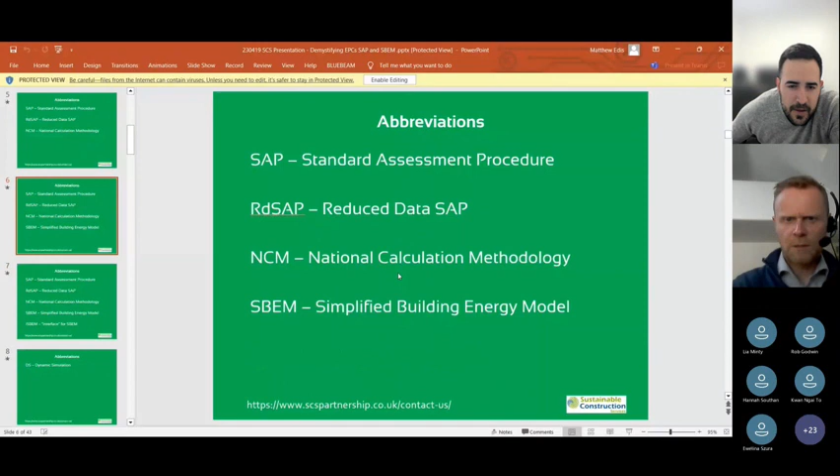Sometimes people here. Sorry, say again. The slides. It's just staying on slide number 1. Did you want them to move forward? Apologies. So you can't see what I can see now? Can you see this? Yeah, I can see that now. You've changed the slides. I'll stay on this then. Apologies. Hang on, I'll just shove that over. The joys of technology. I'll move that as quick as I can. Okay, yeah. So here we go.

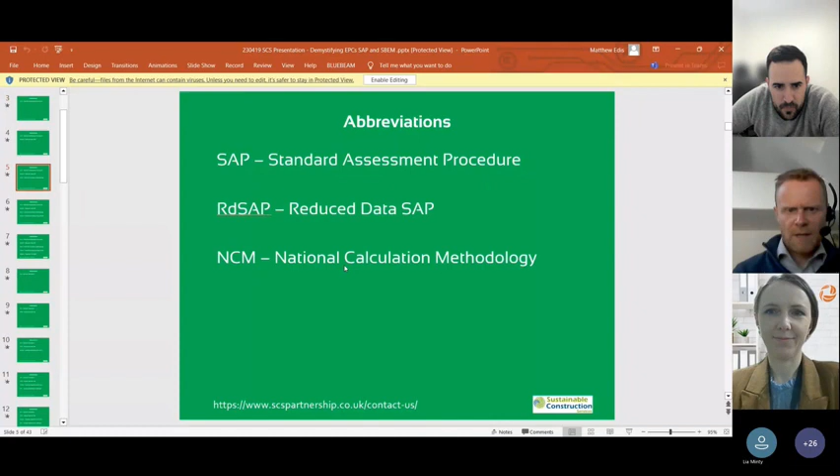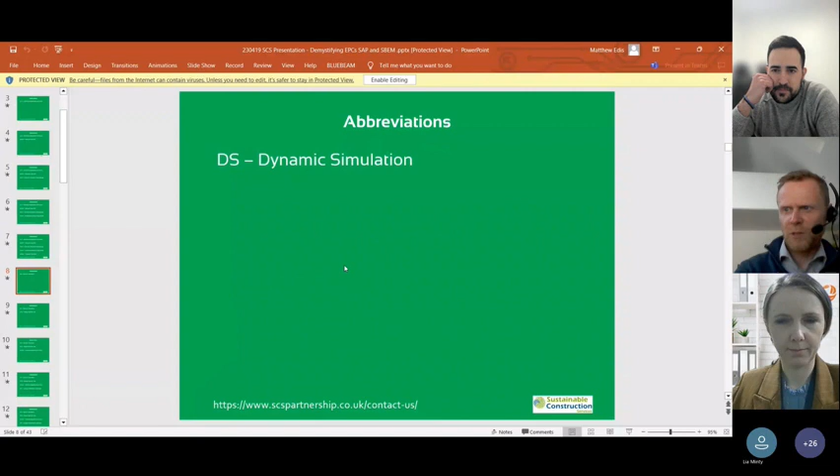So RDSAP, NCM, National Calculation Methodology, SBEM, Simplified Building Energy Model, iSBEM. The acronyms go on. DSM, Dynamic Simulations, so a much more interactive, sexy, super duper version of modeling, which is different to the SBEM, but also can be used in Part L. DYS, Design Summer Year, can get confused with DSM, Dynamic Simulation, and is to do with overheating. And then there's TRY, which is the test reference year as well.

So you've got that. The BRUKL, quite a lot of people talk about BRUKLs. If you're not sure what that is, it's the Building Regulations UK Part L. It's the document you get out when you do the energy calcs, and it's the standard response showing how you're complying against the criteria in Part L.

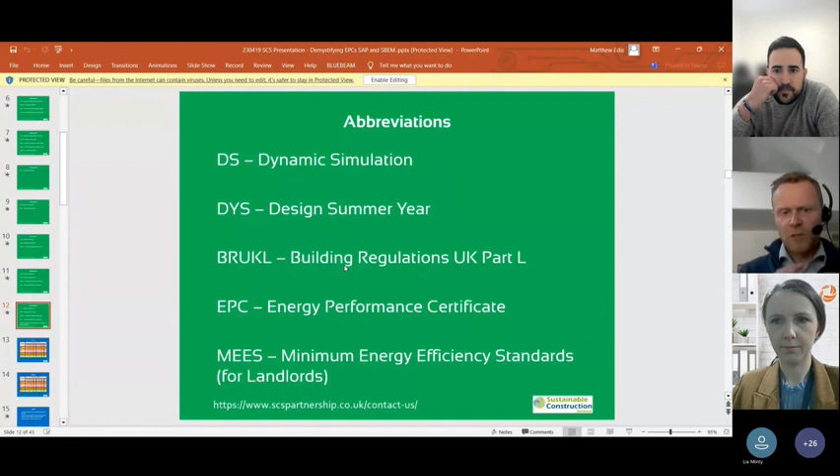EPCs, most people talk about it, it's probably obvious, but energy performance certificates. And MEES, minimum energy efficiency standard, is the thing that landlords worry about when it comes to EPCs. So if I mention some of these acronyms, then that's where it's come from.

Okay. History of Part L. Part L is the conservation of fuel and power. So we never used to be interested in CO2 back in the 70s. I mean, it came around first in the 50s, but something looking like what we've got today came in 76. Anybody who's aware of the history of fuel knows that's when there was the oil crisis in the 1970s. So around that time, we started to get a bit more focused on energy use.

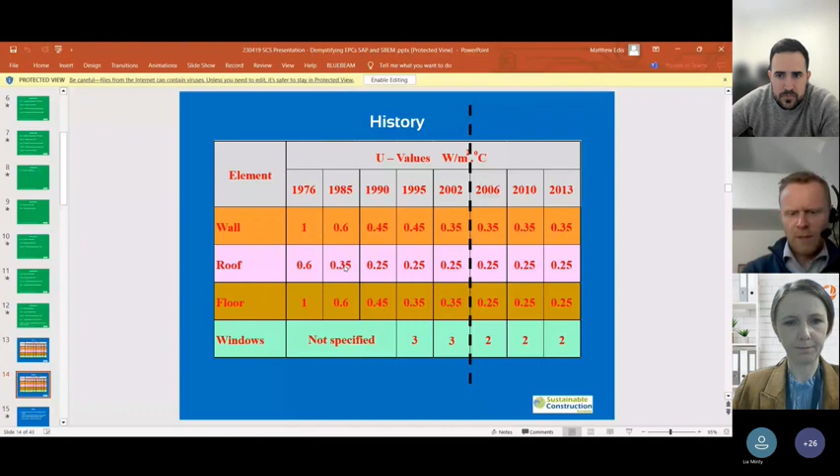And over time, you could see that there's an incremental improvement in some of these wall and roof U-values. But then there's a kind of line in the sand where you can see that nothing very much changed, 2006, 10, 13. So why was that? That was really when energy modeling came in. So why did we get into energy modeling? Building regs never had these energy calcs.

The big thing that came in was the Energy Performance of Buildings Directive. It's a European Union requirement, and it said that all member states had to have a way of addressing emissions in their buildings, and to try and respond to things like the Kyoto Protocol about CO2, and obviously we've had the Paris Climate Agreement subsequently. So it was really that thinking. And at the time, best part of 20 years ago, that was pretty innovative. And so all countries had to do something about it. And we'd only just released our 2002 building regs when this all kicked off.

So the targets were that we're going to reduce emissions by 25% every 3 years, we were going to get down to net zero by 2016 to 2018, and refurbishments were going to be as tough as new build. That was the aim, and that was the great hope.

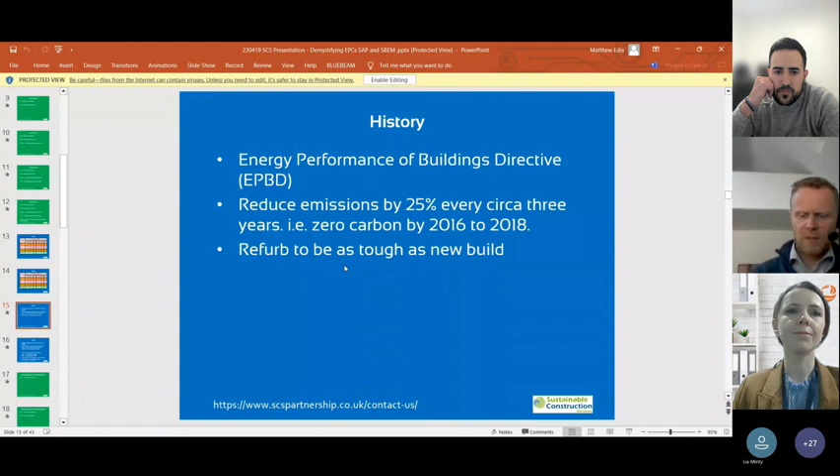The reality is somewhat different. 2006, there was a 25% reduction on 2002, but then it was only 8 to 10 again in 2010, and it's taken until 2021 to be able to get 30% down. So in overall terms, we're only about half of what we were in 2006. So 2002 is an interesting one because we defined our performance against the 2002 building regulations.

So the idea of it was that you would build an energy model. It would be based on the regulations that were applicable at the time of 2002, so very much elemental. What your U-values were, what the efficiency of equipment and boilers and lighting was at that time, and therefore we were going to use that as the line in the sand. That's adjusted in more recent regs, but that was the original idea, and then we put some reduction factors.

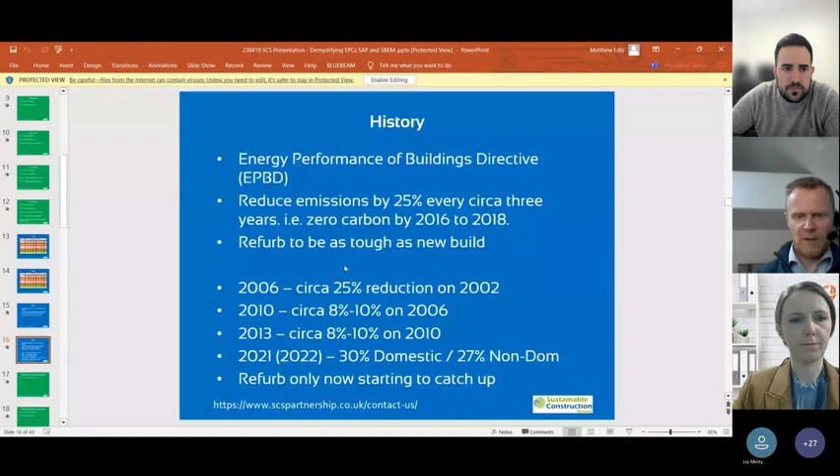So the idea was we were always sort of trying to move it on and move it forward. That's why, even though these numbers add up to more than 50%, I would suggest we're only kind of 50% better than we were years ago. Okay, so that's the potted history. I don't want to labour it too long, but okay, building regs and trading standards.

Why trading standards? So Part L, everybody's fairly familiar. Building regs, thou shalt do certain things. You've got to get it through the building control officer, and Part L is part of the checks of that. However, EPCs are not actually a regulatory requirement for building regulations. They're technically a trading standards document.

EPCs give you your lovely A to E or A to F energy label, but it's very much like your fridge or your cooker or equipment like that you get for electrical goods. So therefore, it actually comes under trading standards.

Now, the reality is that in the time I've been qualified, I've never had any contact with trading standards. And the only time that anybody asks for them is when the building control officer asks for them, as part of the mandatory requirement at the end. But technically, the people who govern EPCs are trading standards.

Okay, so where else do you use Part L calculations? You tend to hear them being used in planning applications, BREEAM, Home Quality Mark, that sort of thing. So what you're doing there is producing calculations that are standardized and consistent. And that's really the key to the use of SBEM or SAP. And the reason that the councils like it is because it gives you a standardized methodology to follow.

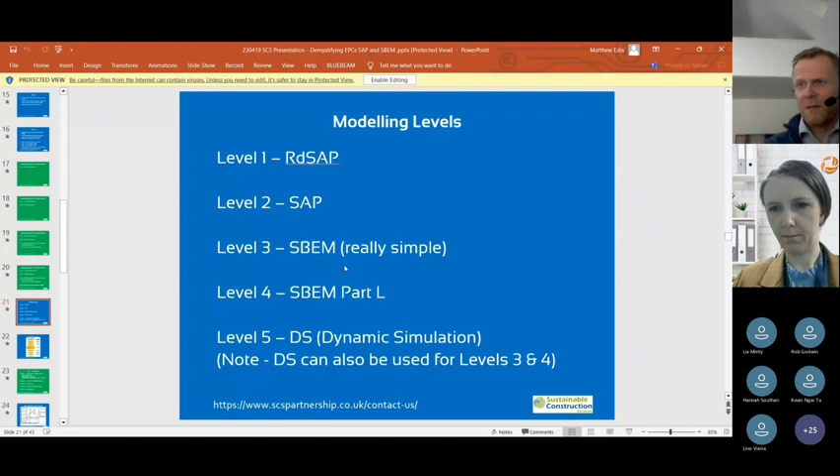SBEM level 4, you've got most buildings, but level 5 covers anything that's more sort of sexy, I guess. Anything with an atrium, dynamic blinds, those sort of things that are going to be a bit more interactive and iterative on the model performance, and therefore you're allowed to use a dynamic simulation. Interestingly, you can use dynamic simulation also to cover levels 4 and 3. Why would you do that?

2 reasons. One, because as a modeler, the rules for level 5 are slightly different to level 3 and 4, and it's easier to only have to remember one set of rules rather than having to keep on jumping between rules and make errors. But the other is that you would generally want to use a level 5 because you get a slightly better result. The dynamic simulation tends to produce a better answer than the SBEM answer because it's a better way of mimicking your actual building performance.

Whether that's right or wrong, I've long since given up trying to argue the case, but it is just a statement of fact. And also, different softwares are slightly different in their performance. TAS produces an ever so slightly better result than IES. Not massive, but it's marginal.

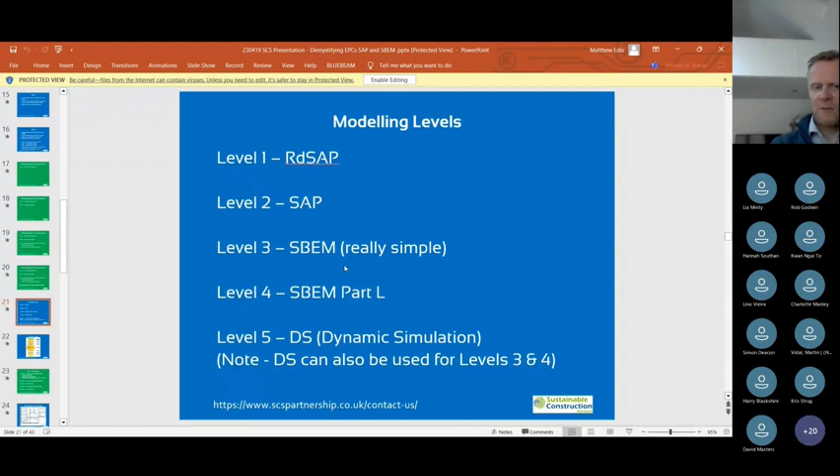And on one project, because it was such a fine line and the BREEAM was such an important thing for the outstanding rating, they actually ran the TAS model for BREEAM compliance and ran the IES model, because it was the one that the contractor's team wanted to run with, and used that for building control submission and EPC lodgement. So that's a bit of an extreme case, but it does show you that even within the software there is slight variation.

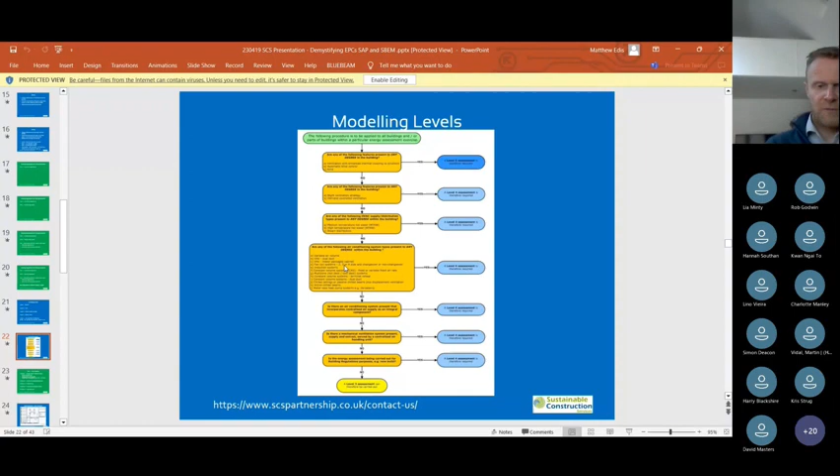And this is the table you follow. You can find it in the conventions and documents that are associated with Part L, but you follow this. But if in doubt, you go to level 5 if it's non-domestic. Okay, 5 criterion. Keep on rattling through. Part L, there's 5 criterion.

One is focused on target emission rate. So you build a notional, in whatever software you're using, you put in the data about your systems, your equipment, your usage types. So is it an office, is it a classroom, etc. And it produces a couple of calculations. In the domestic it produces 3, in the non-domestic it produces 2, and it's an emission rate, so the CO2, and a primary energy rate, the sort of energy use of the building.

And generally all these softwares and calculations are producing energy calcs, and then once you've got your energy result, you then apply CO2 factors. And the biggest single change between the current regulations and all the previous versions of regulations, the CO2 emission for electricity used to be sort of 2.5 times the CO2 emission rate for the same amount of energy used compared to gas. Gas doesn't change, and electricity does over time as we green the grid, and the number for electricity is much more comparable to gas now.

So when you start to apply COPs, coefficients of performance, the sort of energy in to energy out, when you're using heat pumps and stuff, for every 1 kilowatt of energy you use, you get 2.5 kilowatts of useful energy, that sort of thing. You can see that everything is going towards electric, and that's a good thing anyway, because it means we're not burning fossil fuels that, once released, we can't really get back into the ground.

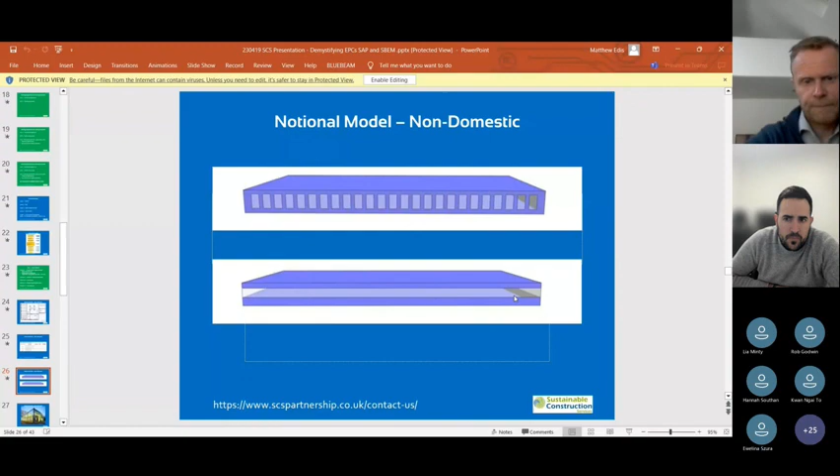But what does that really mean in visual terms? It means if the top here is your actual building, it's going to create in the notional building a glazing that is 40% of that facade, and it's going to apply that to every single space. So instead of it being actual windows, it's assuming a standardized amount of glazing. What it's trying to do in simple terms is avoid something like this: floor to ceiling glass everywhere. It's really trying to push you away.

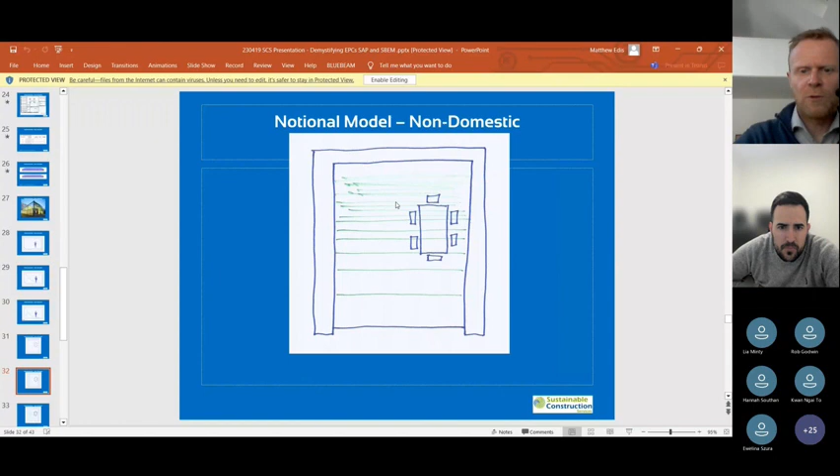This is a room based on a plan view rather than a section that we had before, and I've tried to draw something similar. Apologies, the image hasn't come out wonderfully, but you can imagine the light tends to weigh at the back. If you have punched windows rather than full width windows, the amount of light doesn't actually change massively.

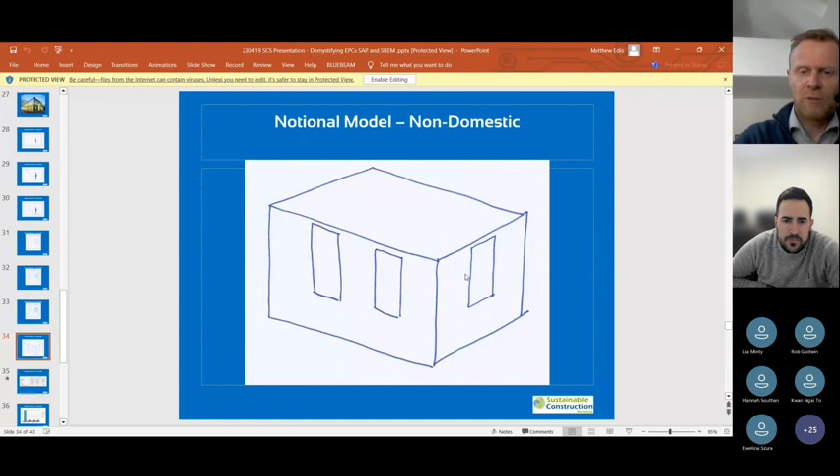What does all this mean? It's not very sexy, doesn't look great architecturally, but to get a good performance in Part L or in EPCs, you want windows that are no more than 40% and tend to look a bit like this, so that you're getting evenly spaced windows across and nice windows to the top of the space.

As I say, architecturally not very sexy. Here's some of the stuff about the notional building. I was saying that the notional building has actually got tougher U values than the Part L minimums. So if you follow the Part L minimums, you won't pass.

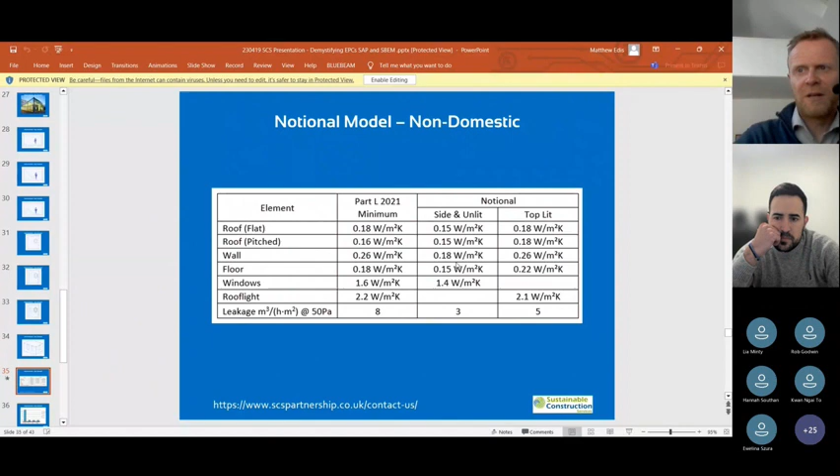If you follow the notional figures, you probably won't pass, because despite whatever the documentation says, that if you follow all this you'll pass, the reality is there's so many little caveats and limitations and conditions and what ifs in the software that if you just follow these figures, you still won't pass. So you have to go even further than these. And certainly when it comes to glazing, that is a definite area to attack if you possibly can.

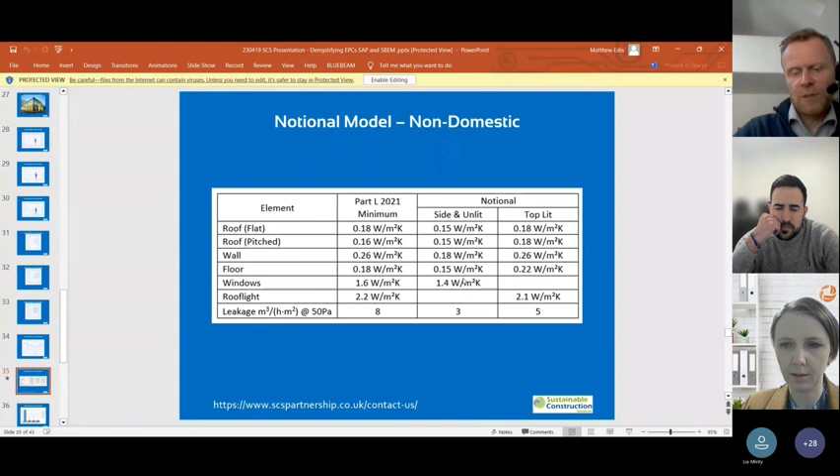Most people I know, when they go to the gym, they don't have a shower, they come home and have a shower. Or when I was at school, I don't think anybody showered in our school after PE, because if you did, then someone would nick your clothes. So you didn't have a shower.

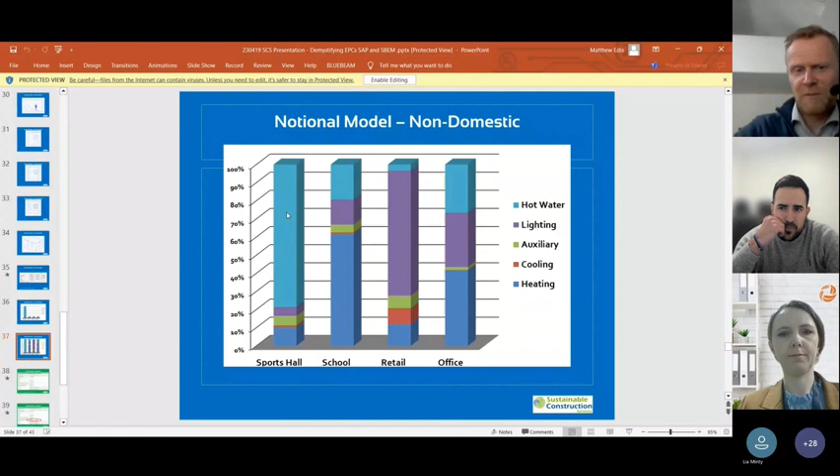But these are built-in theoreticals, so it's a comparative performance. Whereas a school might be more about heating, retail is going to be heavily dominated by lighting. That also means, therefore, U values in building fabric aren't actually that critical for a retail to comply. And an office may be a bit of a mix. I personally think that the hot water in the office is a bit of an overestimation, but I'm not in control of the results. So with these notional buildings, when you're modeling, you've got to think about this, you've got to think about the equipment efficiencies.

So what it means is there's more than one way to skin a cat. If you're working on, say, a school project, when you come to the next one and say it's a retail, the rules and the guidance of where you should focus to get compliance differ depending on what your building type is and what the usage profiles are. So there's not one rule that fits all. It's not a case of always hitting your U values and the equipment achieving certain performances. It may be that in this example of the sports hall, focusing on the hot water will be one of the most critical things in compliance, whereas retail will be more about the lighting.

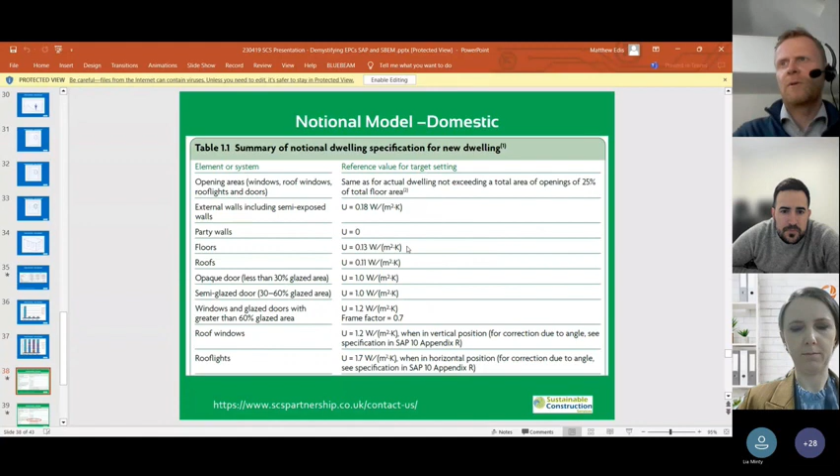Notional buildings, the domestic, same sort of thing. You build a notional building, you build your actual building, you compare the two. But there's two things that are absolute killers in the domestic. One is the window. Now in the building regs document, you won't actually find this, but there's a G value. G value, in simple terms, is the amount of solar gain that comes through the window, the amount of energy that is beneficial solar gain. So if I've got a G value of 0.63, that's saying 63% of all the available solar energy coming through the glass will come into my space and offset my demand for mechanical heating. It also is asking for a U value of 1.2.

Anybody who's an expert on glazing will know that that's a pretty hard ask, and there's almost no one who builds glazing to that level of performance. One of the reasons for that is to get the good U values, there's cost associated with glass and the thickness of glass, there's cost associated with the frame. So one of the cleverest ways to make a U value better on glass is to make it more reflective. The radiant heat doesn't go out of the space, it gets reflected back in. The downside is it's also more reflective when the solar energy is coming in. So you're immediately behind the curve compared to the notional building, because it's getting all this, in inverted commas, free heat.

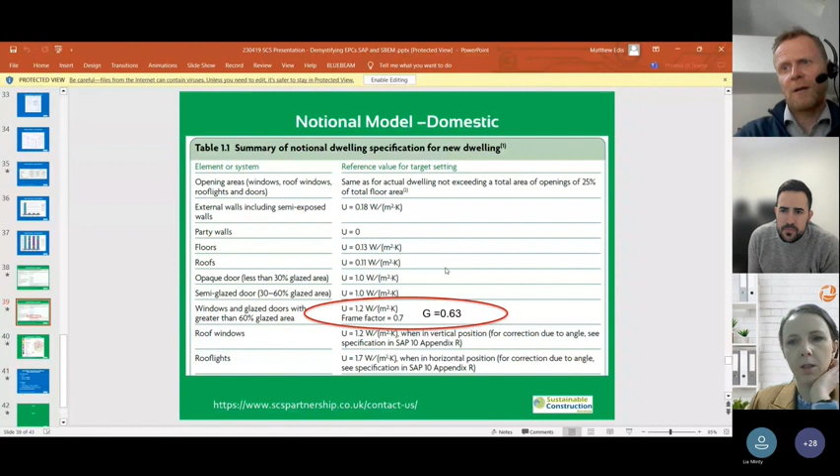The other thing that's an absolute killer in domestic is thermal bridges. And thermal bridges are an absolute killer because you have to calculate everything and you have to put this all in manually. And in most of the calculations and most of the fabric performance levels, the notional building's got a super high performance. And one of the biggest problems is that people are still not really waking up to the need for these. It needs to be calculated. Contractors are really struggling with it.

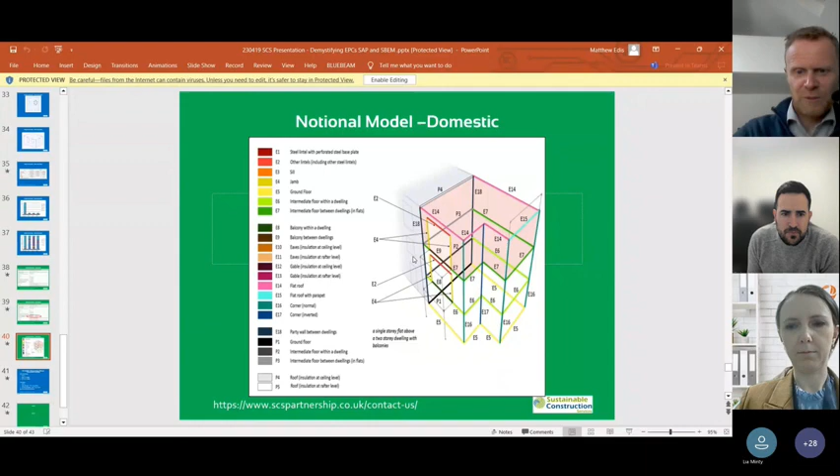And what you're going to find is there's a ticking time bomb with the new regs, which is buildings will fail because their thermal bridges were not up to the right levels. And there's nowhere else you can go because you can't get the fabric energy efficiency to pass without super duper fabric and junction performances. And the only way you can prove it is to rip the building down and start again, or to rebuild the junction. So yeah, if only I had more time to run through that, but yeah, ticking time bomb.

These EPCs are being set to achieve for non-domestic a C by 2027 and a B for 2030. That's going to pick up the vast majority of buildings. Domestics are in theory going to be a minimum of Cs, and this is for anything that is rented. If you're an existing occupier, it's fine. So where's the ticking time bomb for this one? Landlords. Landlords are going to be most interested in your EPC performance, because if they can't rent out their dwellings because they haven't got the right EPC, they won't make their money.

Where's the problem with that? The problem is in domestic, the way that you get a good EPC performance is a combination of good building fabric and good building services. And just to give you a feel, most of the new builds that we've done are generally Bs, a few are getting Cs, but generally it's a B. Anything existing, typical houses built in the 60s, 70s, they're going to be Ds and Es. So anybody who's renting an older property is going to have a problem.

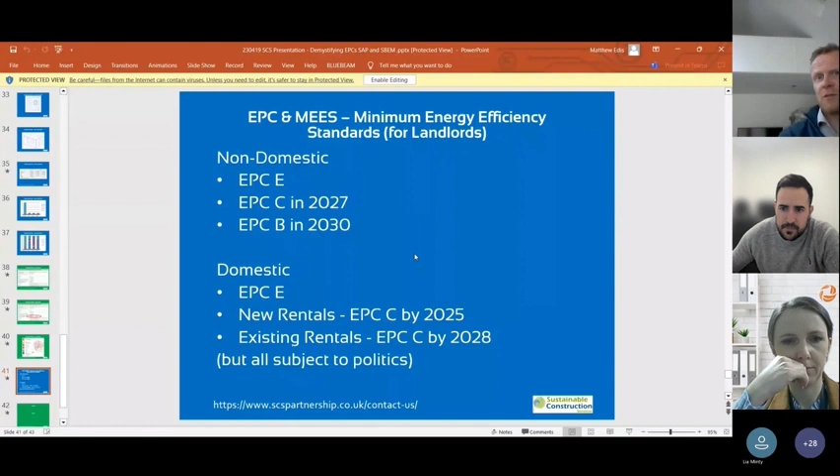Now that's a real problem for landlords, because if I'm a landlord, I can't rent out my building unless I've got a really good EPC. But my EPC is predominantly affected by what systems are being selected and used in there. And who is in control of that in a lot of rental properties? The tenant. So the tenant can't rent it from the landlord unless the landlord's got an EPC, but the landlord's EPC is entirely based on what the tenant has put in there. So it's a little bit of a catch-22.

And of course, landlords don't want to completely impose onto their tenants how to fit things out. So once again, you are going to get a lot of spaces that can perform very varied. So we've done EPCs on buildings, typical office, couple of floors, 3 or 4 retail units at the bottom, and they've performed anywhere between a D and an A. So it's not the landlord's fault of those performances, it comes down to what's installed.

And moreover, the area, the types of spaces, the more services that you put in, the better the EPC performance, which is slightly contradictory. What it's asking for, in theory, makes sense, because what you're saying is, I need a better heating system or a more efficient equipment system to show that compared to what is in the EPC, which is based on a reference building, which is slightly more based on 1990s type building design rather than the notional building for Part L. So there's assumptions about lighting being more manual and stuff like that.

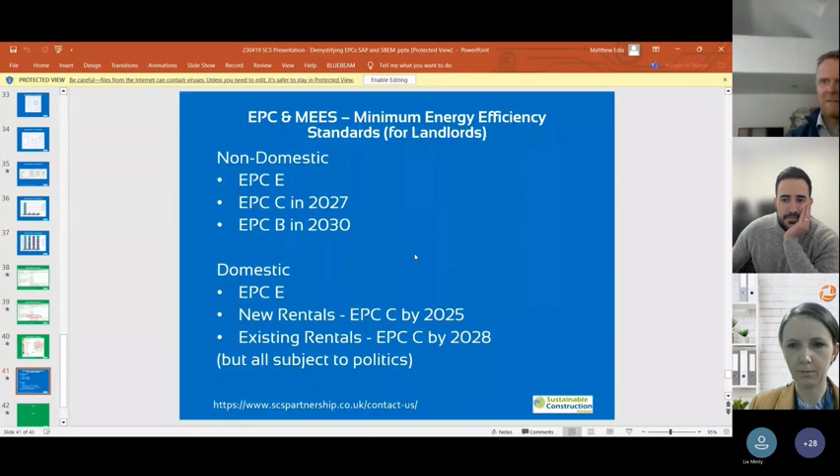An EPC is a prediction of a typical energy performance, not the actual building performance, compared to a reference building. So if you chuck in loads of systems, you might make it work well. But I've been into retails where there's virtually no energy being used, because they've got really simple lights. They don't really turn anything on. They might have an electric heater that they never turn on, because you can imagine an efficient chip shop is virtually self-heating. But the more systems you've got in there, the more ability you have to show, well, look, my energy efficiency is better compared to this baseline.

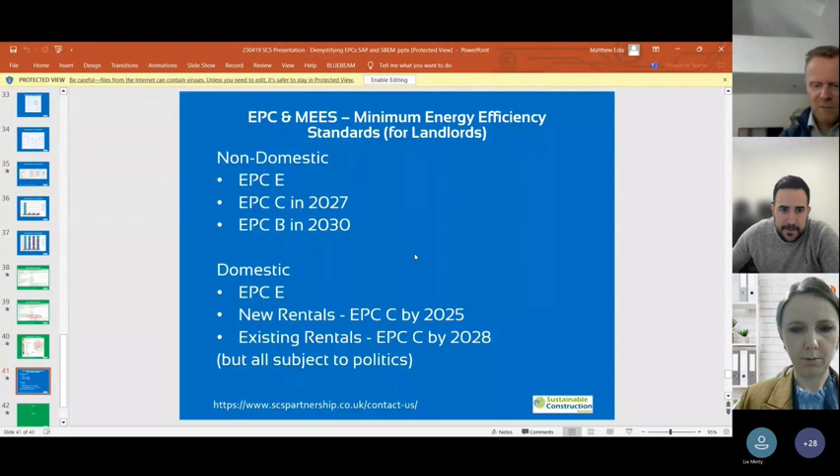So bizarrely, we may end up in a situation of landlords having to put more equipment in for their tenants that the tenants don't use, which is a bit of a grey area. Is that environmentally a good thing to do or not? So yeah, some exciting challenges, and that comes on to my last thing, which is the future. Certainly, I think Part L compliance and EPCs are driving towards all electric systems. I think that's where the net zero carbon strategy is going. So we're all going to be moving away from gas over a period of time. That's going to be a real challenge for Resi, where so many people have gas boilers and combi boilers.

But overall, these targets are only going to get more onerous, but we are probably reaching the limit of what we can do in terms of fabric, and beyond that, eventually we will be getting into a balance between operational calculations or Part L. There's always going to be a place for Part L calcs, even if people do talk a lot about CIBSE TM54 and operational energy studies being more accurate, because it covers all parts.

It's a consistent document, and therefore for planning, policy and building regs, it gives you a consistency, whereas with operational energy studies and TM54s, there's a bit of subjective flexibility and economy of the truth in terms of what I'm using and what I'm not. So wherever you've got fewer rules and more flexibility, you're going to find navigation. So Part L is going to be around for a good while to come, and it gives the industry at least a standard that it can follow.